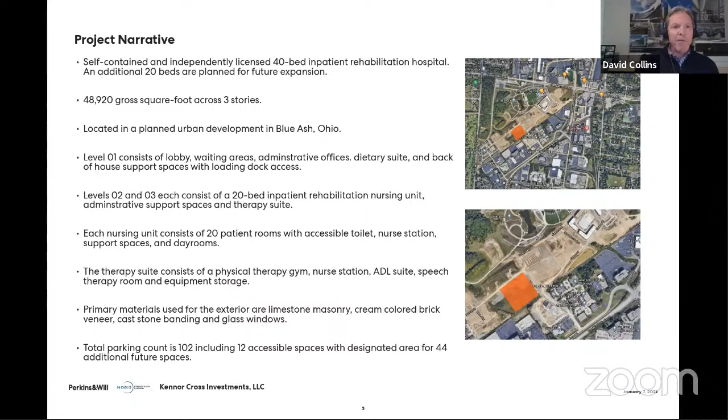Stephen's doing the computer work because I'd really mess it up.

We really talked about the physical therapy area and what kind of view it would have, so it was important to think about placing it like we have here. If you can point to where the physical therapy glass wraps around, that corner of Carver Woods and Parkview has a direct line of sight to Summit Park. That was very important in how we placed this hospital, because that's where these patients go every day and work hard to get back to hopefully their original baseline of what they had before an accident or a stroke or something like that.

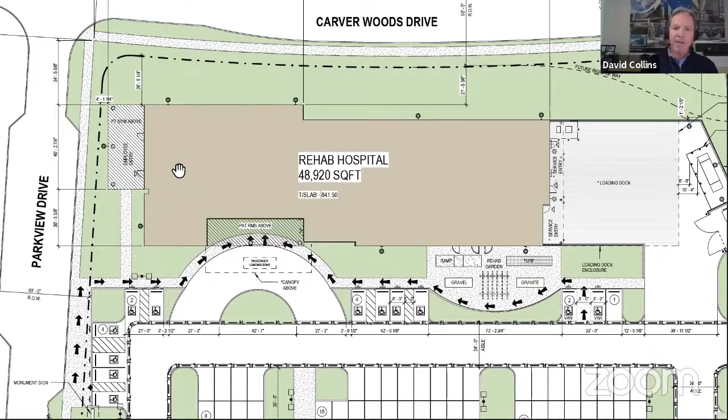Let me say also, this is a rehabilitation hospital, not an acute care hospital. The only ambulances you'll see will be transport ambulances. There will be no live ambulances coming and going from this facility—just transporting from an acute care general hospital to a rehab hospital for care, without sirens on. I just want to make sure everybody understands that.

As we go around this, we thought it was important to put the street side up against Carver, so that the physical therapy really would have a great view. The inner side, where all the parking is, is the entrance side. If Stephen can show the drive-up court for that.

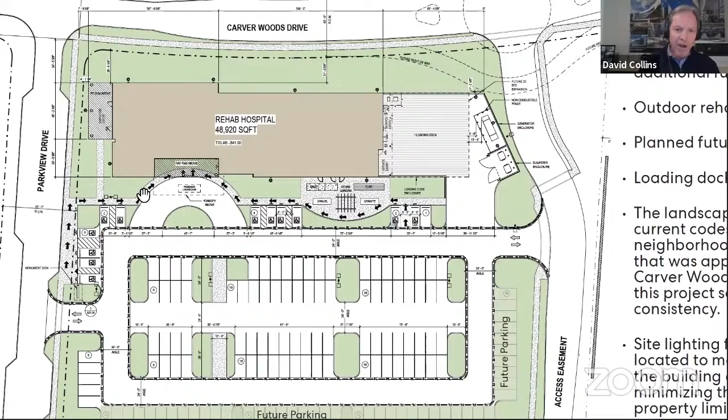We've worked hard on this design. There's no curbs in that area—everything is level, a situation that gradates up, feathers up. Then as you enter into the drop off, you can easily go into the lobby through a vestibule where Stephen's pointing right now.

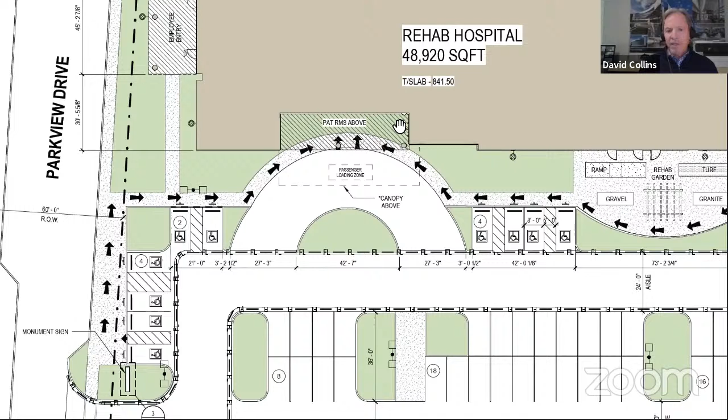As we get further into this, right now it's going to have about 102 parking spaces, which we found out is pretty much perfect for this 40-bed hospital. That's enough for staff and visitors.

As this hospital does expand, Stephen, if you can show how it would expand on the site, it merely fits above the loading dock area. So the original beige building would be the first build. There could potentially be an addition in the future, in the gray box that Stephen is putting right there, that grows into the loading dock area as it would be built right now.

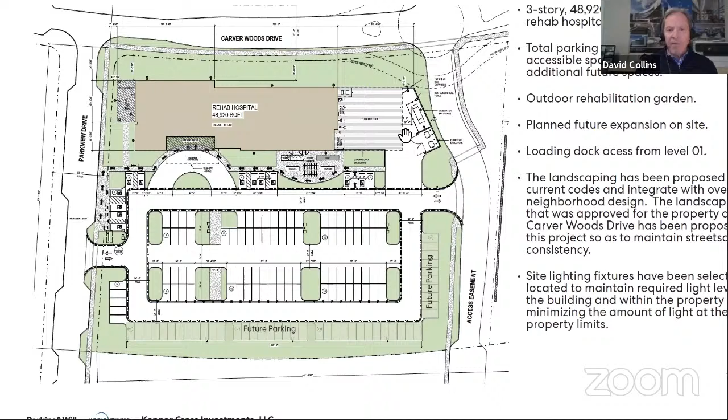Below that, on the right side of the entrance, is what we call a rehab garden. The rehab garden is composed of a trellis, and the trellis is wood. We're trying to capture some of the materials used on Summit Park, and the trellis being wood, we'd like to use the same stained wood that was used on that beautiful park that was designed.

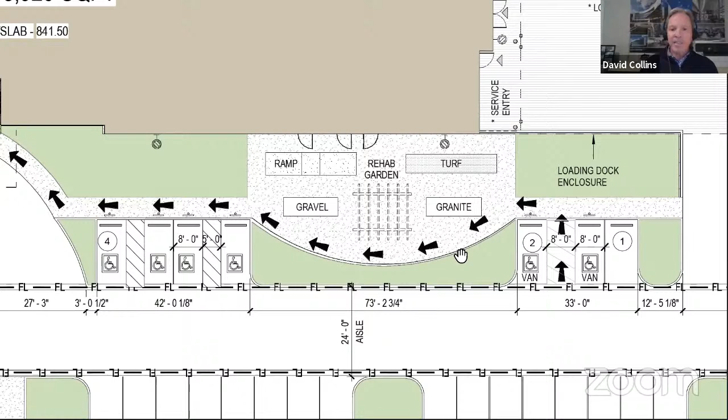This rehab garden is basically for patients to come down and work with physical therapists on all the different conditions they might encounter navigating the outside world—going up ramps, walking on grass, walking on granite or gravel, things they may have to literally relearn how to do. So it's an outdoor physical therapy space that's also well landscaped, with a beautiful trellis and benches below it for patients to sit and take a break. It's a very nice designed feature for the whole hospital.

Does anybody have any questions so far?

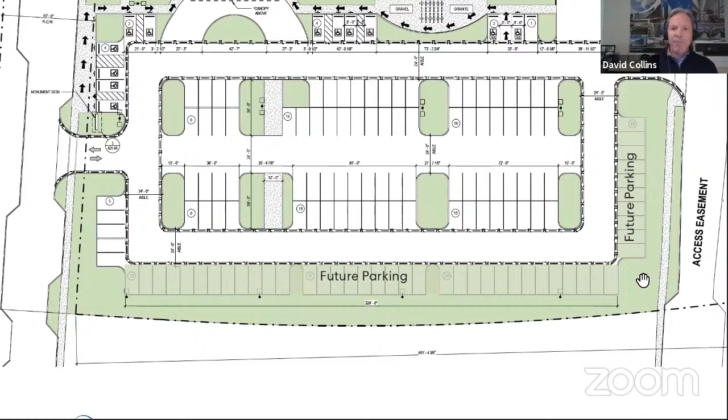If you could go all the way down and show where the future parking would be, Stephen, as this might grow, and we don't know if this would grow to 60 beds ever, or within 5 years, but it certainly wouldn't probably do so in the first few years. But we have designated how to increase the parking per code and per what we think we'll need for this building. This gets up to a little over 140 parking spaces on the site. But I think you can still see that we're not tied up against any of the property lines. We think this building, the parking, sits very generously in the site. And we think it's located up against Carver Woods to have the best views for the patients and the therapists that are working there. So if you can go to the next page, Stephen.

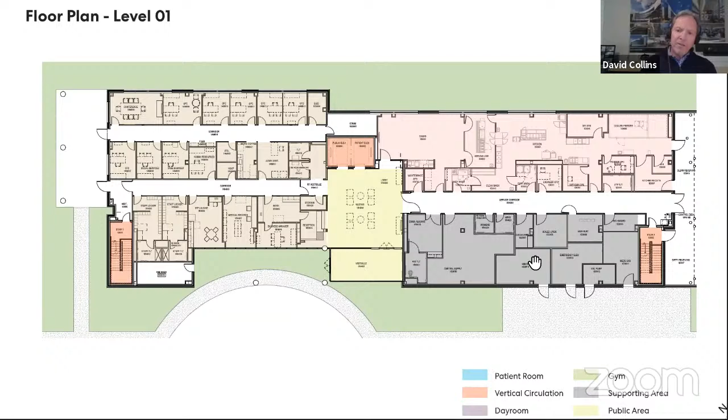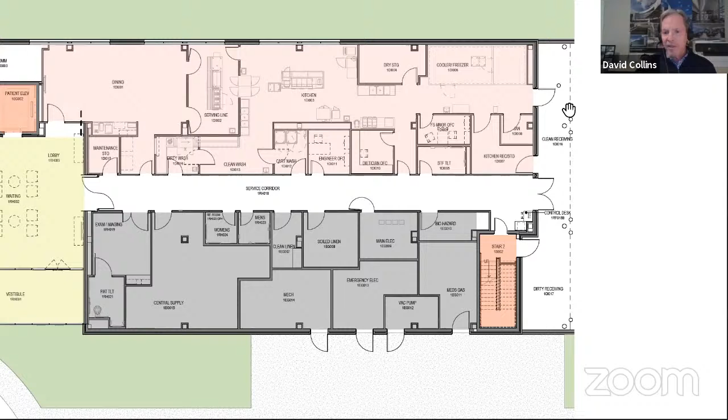Everything in the gray you see, the largest block is what we call materials management, all the storage necessary for linens and different items used throughout the hospital. There's clean linens, there's mechanical, and then to the far right you can begin to see the dock area. The dock basically is a large, very open dock. We do have a generator in the dock yard, and obviously our dumpster, but both those have enclosed fences. So it's a nice sized dock for trucks to maneuver and get in. This is not a raised or a lowered dock. This dock is at grade, so just to note.

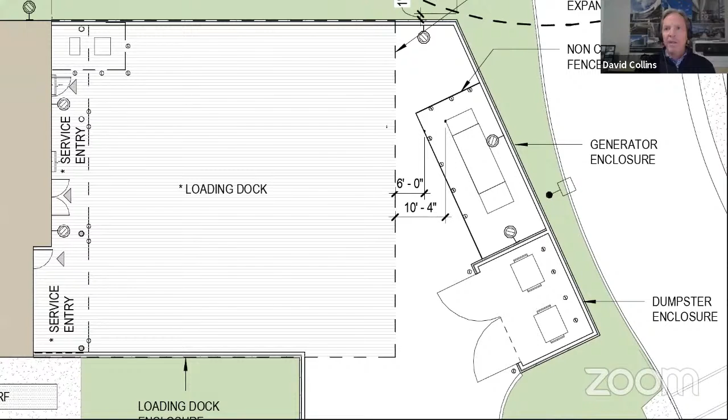Landscaping has been proposed to blend in with the overall neighborhood design, so we'll be working hard with our landscape designer to really blend in to what you've already created. And I think that's important to note.

If you can go on to the second floor, Stephen. Okay, the second and the third floor are pretty similar. The beds are in blue and they're going to be exactly the same on both floors. There's 20 beds per floor, which in rehab terms is sort of a sweet spot of how many is best to take care of per nursing unit.

The nurse station is in the very center, and behind it are the main support rooms - clean and soiled utility, med storage, and things like that. In a rehab hospital, you're required to have a lab, and there's a lab on this floor. Behind or close to the nurse station on the third floor, there'll be a pharmacy.

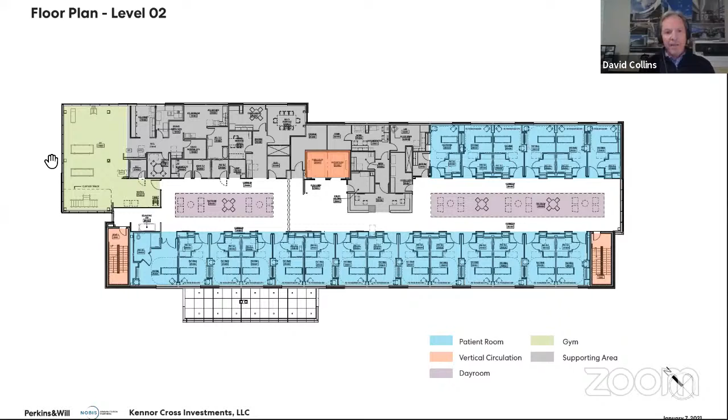The green area is the large open gym, physical therapy gym. On this floor there are rooms called an ADL suite - activities of daily living, where people relearn how to use a kitchen. There's an ADL toilet; the exercise of getting in and out of a toilet is an actual physical therapy exercise they relearn. If they're in an accident and go to a wheelchair, they learn how to pivot and do those kinds of things in those spaces. There's also speech therapy you can see on the bottom left.

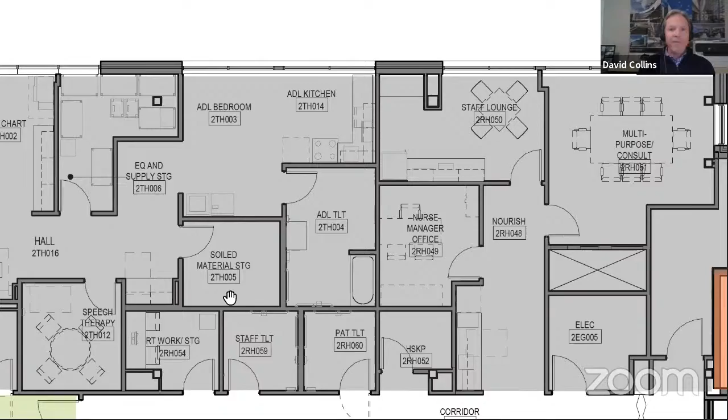And if you'll go to the third floor - yep, you can see it's a very similar layout. The gym is approximately the same size. One thing I didn't mention, there's a lot of space in the middle, that white space and also kind of a purplish space - that's the actual day room. This is really a concept that was originally designed by Reliant and then carried over to Nobis. It's their special way of taking care of patients, and it also brings down the average length of stay typically for a patient by almost a day.

Typically, day rooms are enclosed rooms where you go in and have some activity - it could be occupational therapy, or working with a speech therapist. This day room is designed to be out in the open. What that does is put the rooms about 22 feet away from each other and creates a really large living room with furniture, where physical therapists work with patients, but also family members are asked to come visit with the patients in the day room, not in their rooms.

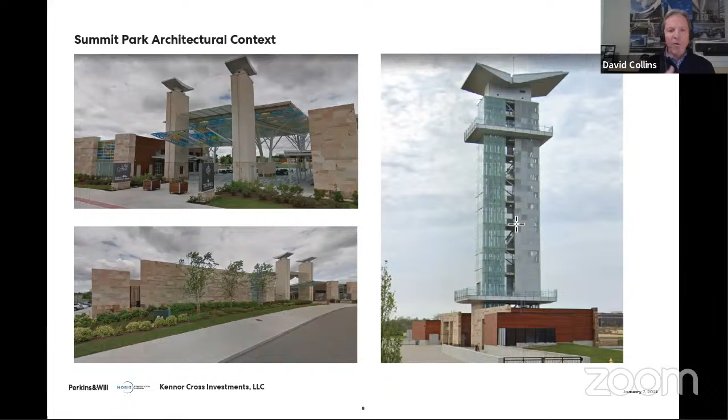When we started thinking about how to design the exterior, we really looked at Summit Park - a beautiful park that's been designed. I don't know if anybody here was the designer, but it turned out beautiful. The stonework is tremendous. We do this for all the different locations we go to - we try to blend into the context of where we're going. So when we tried to figure out a good compromise without copying anything here, we looked at some of the brick, the limestone, the grayness of the metal, and how that worked together with the wood, which brought in really warm tones.

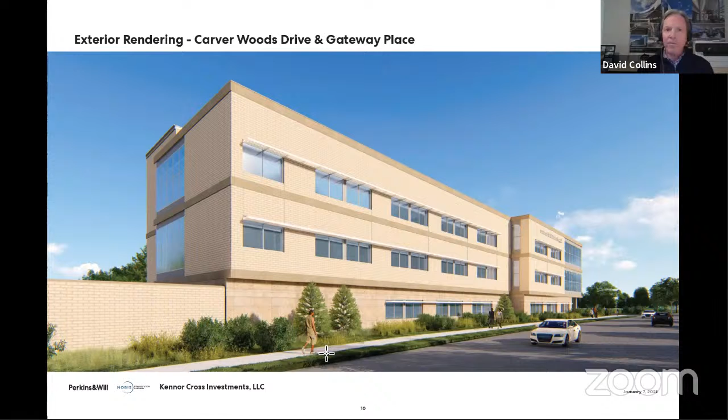We're blending in with the limestone. And then we have large pieces of glass at the very end of the building. Those are at the end of the nursing units or end of the living rooms. And then we have sunshades as a unifier element that are also in that gray ACM color.

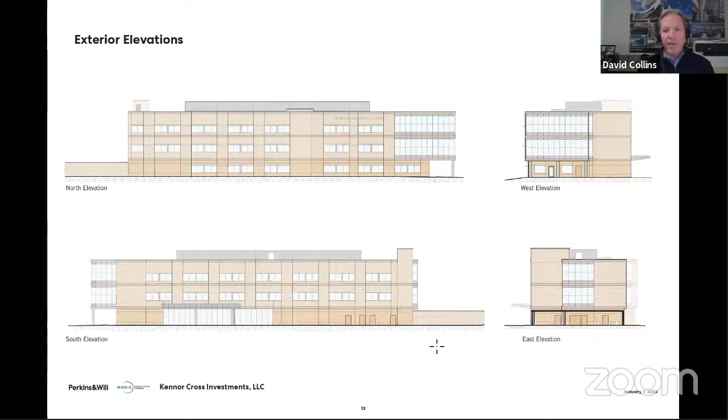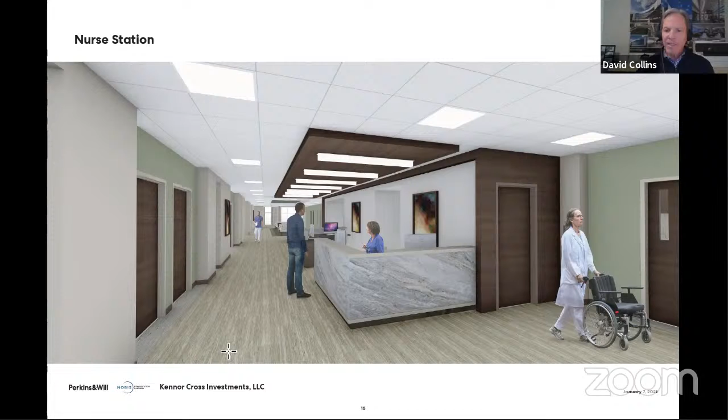Yeah, go ahead, Stephen. So this is starting to look at the day room. The nurse station is obviously right ahead, but you can see how wide the corridors are. We have a slight different color of carpet up against the rooms that have accent walls at the doors. A very simple look, but very open and welcome and inviting.

If you want to go to the next one. This is really looking from the nurse station all the way to the end where you have floor to ceiling glass at the end of the day room. And the furniture is typically always not

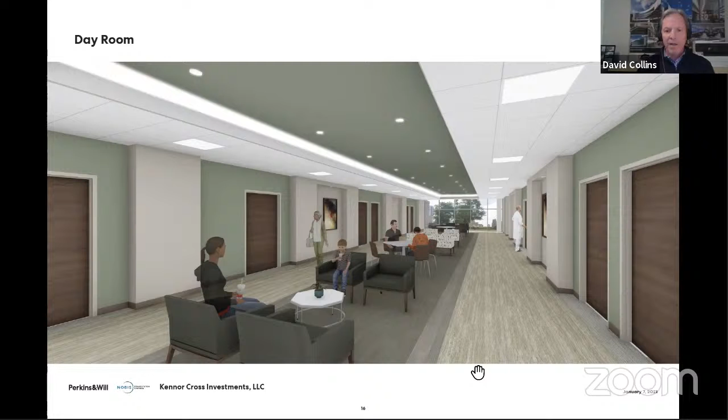bolted down by any means. It's there so it can be moved around, and so that physical activity can happen in any area, really, and they can adjust the furniture as they see fit, depending on whatever kind of patient might come to this facility. Go to the next one.

The patient rooms are generously sized. They're much larger than code compliant patient rooms. But again, the idea is to not make the patient so incredibly comfortable in the room that they don't want to get out into the day room.

The day room really is where the activity happens. They're going to get the most interaction. They're going to get the most therapy. And it's important for them to go out into that room if they want to improve and get back to their baseline. And again, over time, between Reliant and Novus, they found that the day room does reduce the average length of stay for these patients, which is a tremendous way to treat them.

Now, is this the last slide, Stephen?

I think this is the last slide. So with that, Stephen and I and Shane would love to open it up to questions and anything we can do to work with you.

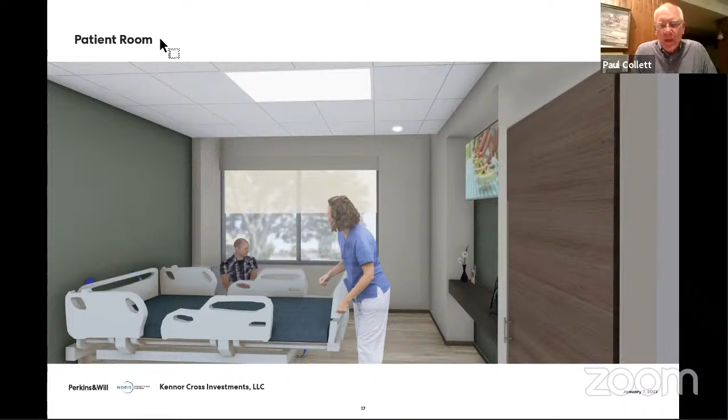Well, thank you for that presentation. I think you've done a good job of describing the elements and how it all comes together. So we're going to take a look at some of these elements, and of course you saw the comments from the city engineer or staff regarding a couple items. I guess specifically the banding around the docks, that you might need some more architectural elements on that. It's a long plain wall. That was their comment, and I think it sort of appears that way.

I think that's a great comment. That's something we can put a header on there to really blend in with the band that we've sort of got at that level anyway. I think we can work hard on that. Okay, that's just the one thing that stood out in their comments, and I will defer to my commission members for their questions to you at this time.

Thank you. So, John Dillon, you have anything? I thought that was incredibly thorough. I don't have any questions right now. Oh, good. Thank you. Steve?

A couple questions. Have we talked with the condo developer that is right to the west of where the parking lot is? Because those condo owners are going to be overlooking into the parking lot. So I think we need to make sure that in this development, we've got good looking landscaping so that our condo development will not be looking at blacktop.

Shane, can you take that one? So we have not, I guess, had direct conversations. A mutual master developer that sold us the land would facilitate those conversations. I know that any upgrades in landscaping that need to be made, we'll definitely look at and work with the adjoining landowner to account for. I do know that we have designed the lighting package to take into account our adjoining land uses, but we will make note of the landscaping and have those conversations.

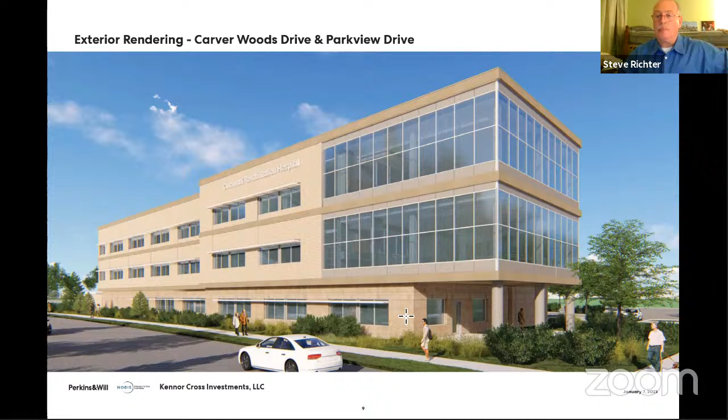So I can make sure I've got all my questions answered—the dumpster area, where you've got those set up, has somebody really looked to make sure Rumpke, our dumpster provider, can actually get into those without tearing up your blacktop? Or are you going to put concrete coming out from the pad so you don't end up with big divots in the blacktop after a year?

Yes. Cardinal Engineering has run truck turning radiuses for us, which has helped work out some of the layout. They're also specifying durable materials for the dock area specifically, as you mentioned, so the heavier trucks don't damage the parking area.

Is this being designed so it will always have to be this type of use, or could it eventually be redone into an outpatient type facility? You'd have to gut the interior, but this could easily be converted to a medical office building if there wasn't a need for a rehab hospital anymore. The width of the building works well for medical office space, or really any kind of general office space, or it could be an outpatient rehab facility.

But the walls as they are, the rooms will be in place with the plumbing and toilets for each room, so that would have to get reconfigured. But I can tell you, after practicing for 30 years, that does happen—you can reconfigure these types of facilities for other uses.

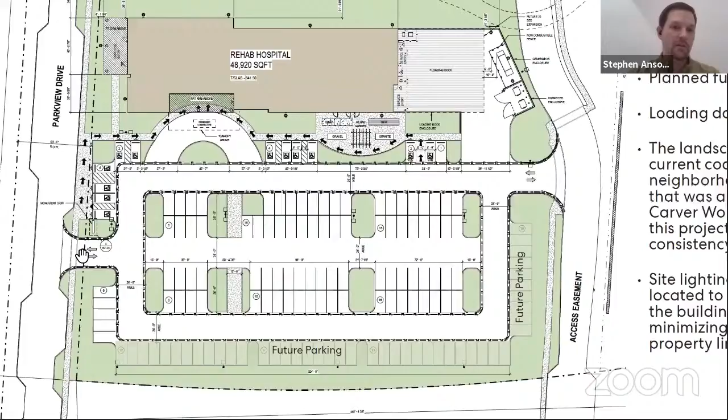No, those are really the only two signs currently planned. As you mentioned, there's the monument sign, located here along Parkview, which provides visibility for people driving there. And then there's the building sign on Carver Woods, visible from this intersection and as you're traveling southbound on Carver Woods. So we thought just the two. We did consider a monument sign closer to Carver Woods and Gateway, but with the future roundabout, we were worried that pushing it farther from the street corner wouldn't be very purposeful.

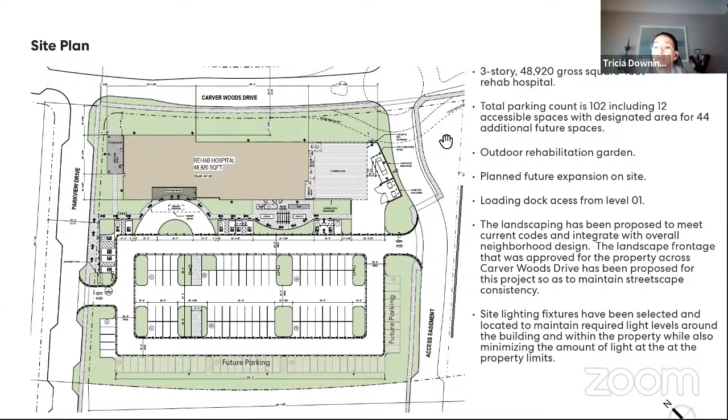Yeah, I'm kind of feeling that as I'm looking as well. I think that makes sense. Is the intent here, since you're working hard with your materiality, to try and blend with the rest of the site? Is the intent to try and match the look and feel of Summit Park's various zone signage as well?

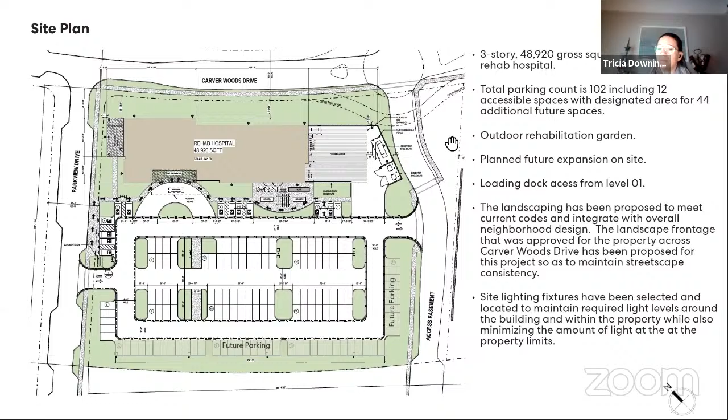Thinking about your monument sign, not so much your building sign or logo, obviously that is what it is. I definitely think we can look at that. There's a fairly standard sign that Nobis uses for their hospitals, but as far as materiality, I think we can definitely look at trying to blend that.

I would imagine the monument sign would be made of some of the stone and brick. Typically what we've done with the monument sign is the base matches the base material of the building. So in this case it would likely be the limestone that forms the base of the monument sign, and then the lit signage cabinet comes in on top of that. Got it. But as David said, if there's a different direction we need to go to fit more with the community, we can certainly look at that.

I imagine Steve has probably seen a lot of this given he's partnered through this whole process. But I know there was a pretty good sized development signage package that came through primarily for the commercial pieces, which may also trickle through the remainder of the development. Those were my two biggest questions. You guys all covered the rest, so I'll yield back to the rest of the crew.

Okay Tricia, thank you. Mike, you've got a list there? Couple of quick questions, comments.

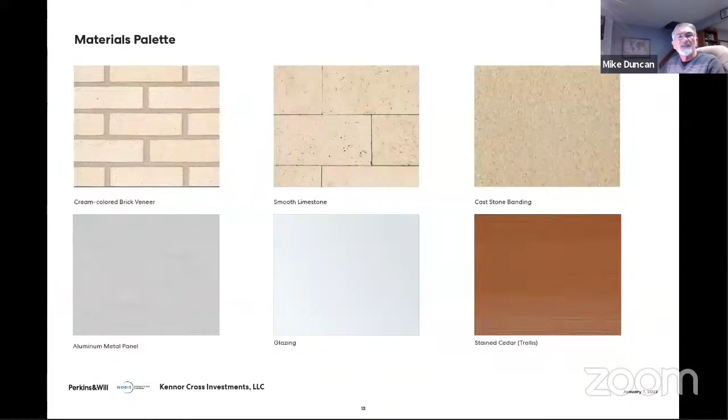That's just a comment. Second comment, can you go back to the south elevation? Yeah, right there, either one, it doesn't matter. To me, that long area where you have an accent stripe, the three accent stripes, it's very plain looking. I don't know if there's a way potentially to work with the city architect.

I know he'll be reviewing the building design and everything, but potentially around some of the windows, maybe some darker complementary brick. I'm not an architect, so I can't tell you, but just from looking at the elevations with all the stone and brick, it was just kind of plain to me, very plain, not much architectural color differentiation. I'm not saying it needs to be done, maybe the stripes would be a little darker, but if you guys would just work with the city architect in cooperation with our architectural standards and take a look to see if maybe a little more color would add a little more flair to the building.

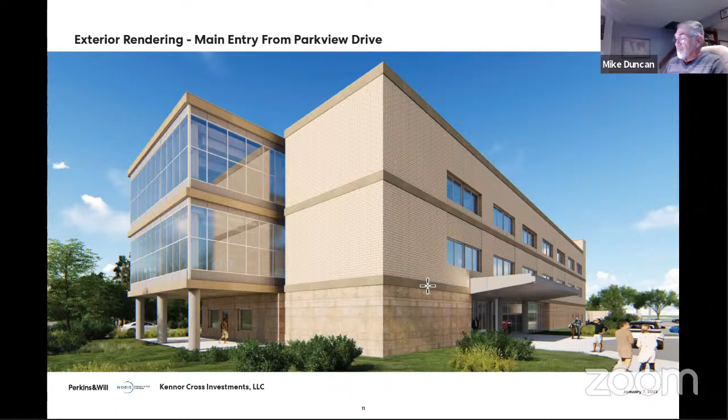Absolutely. And then on your 146 spaces, I'm assuming that with the additional floor expansion on the 2nd and 3rd floor, that would be more than adequate. But my recommendation is obviously if you don't need it, don't put it in. More landscaping obviously will look better for your site itself. Totally agree. And then whomever is there, do you have access to the civil drawing C6.0?

I can try to find it. You don't actually need to pull it up, I just have a couple of questions you can look at later. On C6.0, coming out of the building where you have your rehab garden, and also at the end where there's the employee area, there appear to be blue lines that run to catch basins, and blue typically designates water. I couldn't quite figure out what it was, I didn't have the detail and I'm just looking at it on a screen. It may just be a slot drain in front of something that should have been identified as a storm drain, but it sure does look like a water connection to a catch basin, which didn't make a whole lot of sense. So something on the civil site C6.0 plan.

Those are - this is Don Stegman, I'm the civil engineer for the site - roof drain leaders. So those will be coming out of the building underground where the roof drains come in and tie into the catch basin. Okay, thank you, that clears it up totally.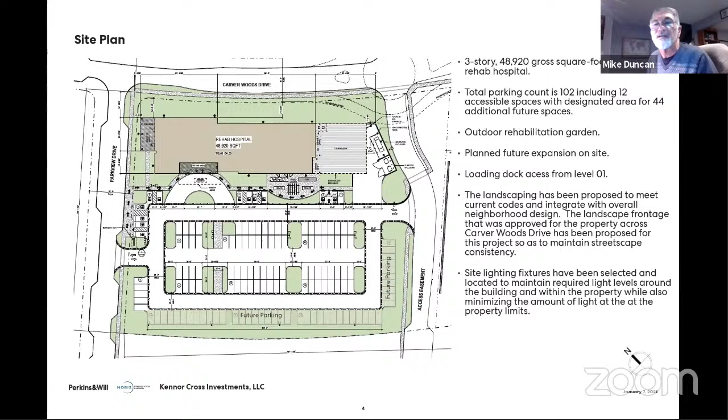Would you also include architectural detail enhancement on the various elevations? Well, the first one says final approval of the building design by the city architect consistent with architectural standards. I think that's adequate - they're going to be working with the city architect to take a look at it, and part of our architectural standards have to do with colors and materials and stuff, so I think that was enough. I was thinking about adding color to it, but I didn't think it was really needed.

Okay, all right, then do we have a second? I'll second. Would you call the roll, Tracy?

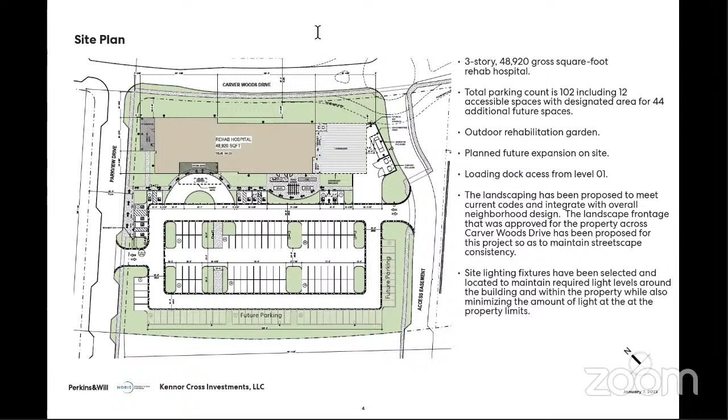Mike Duncan, yes. John Dillon, yes. Trisha Downing, yes. Steve Richter, yes. And Paul Collett, yes. Can I confirm who seconded it? Was that Steve? Yes, thank you.

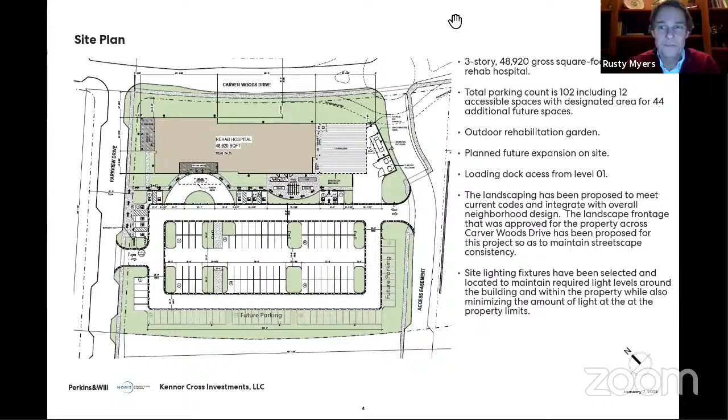Okay, thank you members, I think we did a good job there. Hopefully covered everything. Is there any additional business to be handled by staff? Any miscellaneous business?

You're muted, David. Yes, sorry, thanks. That's always a good thing to keep me muted. I don't have anything to add, but I certainly always want to give everyone the opportunity if you have any questions about anything going on.

There, Minecraft specifically says you cannot run Minecraft on a Chrome. I don't know what that last comment was. Who said that?

Okay, well all I said was Happy New Year's, and I always want to provide everyone the opportunity if you've got any questions about anything going on. Otherwise, I don't have anything else to add.

To you personally, David, I'd just like to say go Browns. Yeah, there you go. Hey, go Browns. I do have one question on a different topic.

Seems like the neighborhood is talking now that they know that I'm retired. Is there any discussion going on about Kroger gas going in somewhere out in front of Kohl's or behind where Speedway was?

No, in fact Paul asked that question at the last meeting, and yes, from the staff perspective, no inquiry from an architect or an engineer or a developer or anything like that. That rumor's been consistent for 2 months though, somebody's out there talking about it. Yeah, still have no indication whether or not they're going to take those utilities underground.